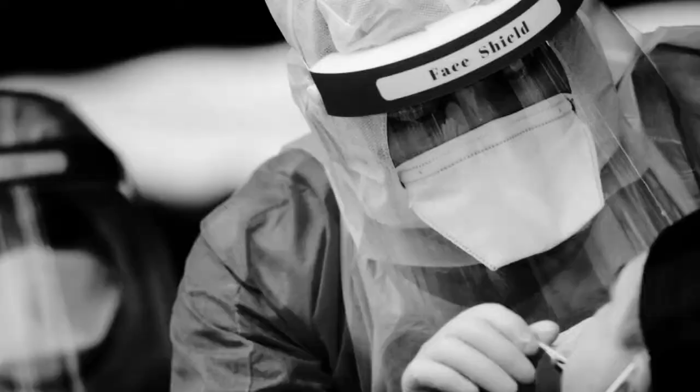As has been observed, the COVID-19 crisis has impacted the way we work, do conferences and meetings. I believe that holding virtual meetings such as this will become a new normal, as it provides many supporting benefits such as the ability to enhance work productivity, reduce traveling costs, and build new connections globally.

Ladies and gentlemen, it is no longer a surprise to see businesses going paperless. Many are now shifting to clouds. We now live in a world where technology has finally matched up with our imagination, changing the way we do things in a much more efficient way.

Similarly, in the military, such technology has to be optimized toward our competitive advantage so that our geographically dispersed forces can focus on their core responsibility. Critical applications and tools such as biometric technology, cyber domain systems, drones and anti-drones, target acquisition, geographic information systems, and many smarter sensory-based applications will be used to aid in quick decision-making.

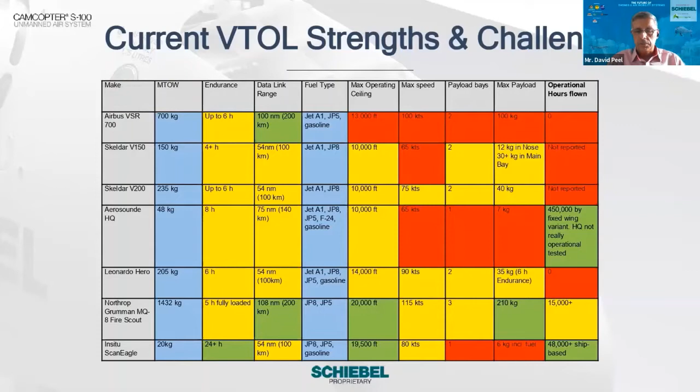Next slide, please. So looking at the technological challenges here, sensor capability has improved enormously over the years. The sensors are getting much smaller, they're getting much lighter. And as this has developed, what has occurred is that the platform that can carry it doesn't need to be as big or have as much capability. But the downside to this for companies is that as the sensor capability increases, we can't necessarily keep pace with the integration of those sensors into existing old platforms.

And we're essentially going down two avenues. The person making the sensor is not the person that's providing the platform that the sensor is operated from. So it needs closer cooperation with the sensor developers and the platform providers to make sure that the technology is compatible. Also, with the need from the end user to have a far greater overall picture, which requires all this latest high definition video footage, geo-fencing, distancing.

And then the ability to process that data and store it is one of the main challenges that we see, because the data link technology, whilst it is obviously moving apace, is not necessarily keeping pace with the end user demand. And as new technology developed, a platform provider has to then look at those data links, how it can get its data transferred in a manner which the end user wants. And that, I would suggest, is one of the bigger challenges.

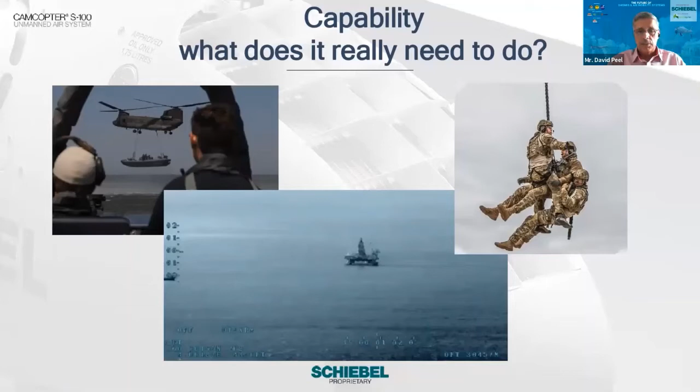So Schiebel have always believed from the outset that we're looking for a multi-role, multi-domain asset. The whole design around the S100 was that we wanted to give it multiple payload bays that could be used in different ways, and that capability would then be complementary, whether it be something underneath on the main cargo hook, or a nose placed sensor. So Schiebel, right at the outset, developed a multi-platform tool with multiple payload bays that could be used in a multi-role situation, rather than just going down the one sensor route.

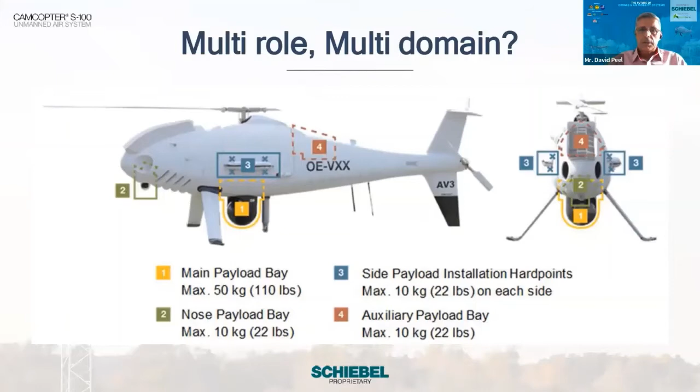Next slide, please. I'd just like to hand back to my colleague Neil, who will talk through some specifics about the S100. Yeah, thank you, Dave. Just to finish off the presentation over the next 5 minutes or so, if we focus now in on the S100, taking in mind what David has said and how well or badly we meet some of those requirements for the future.

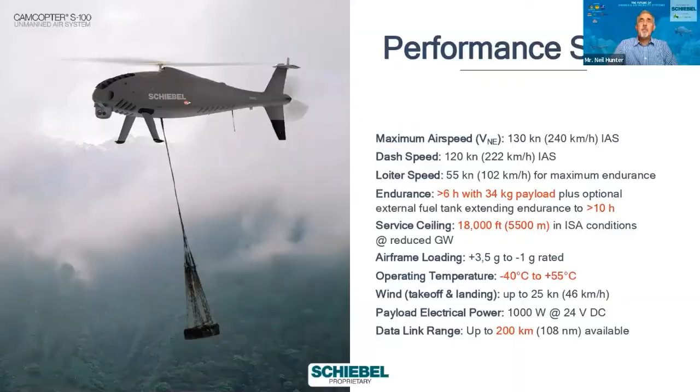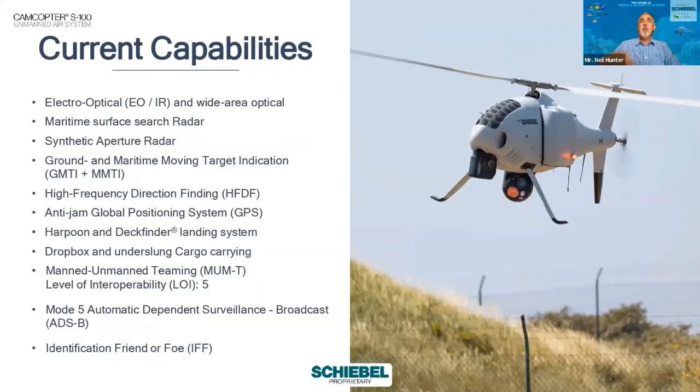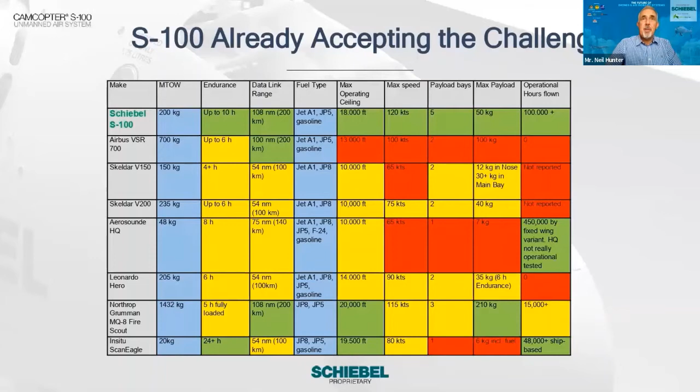So what we've done here at the final slide, we've added in the Schiebel S100 in the top line, and we have, you know, biasly so, probably ranked ourselves as to where we see ourselves with the competition.

And we are truly a multi-role platform with over 100,000 hours of operational experience and still class-leading power-to-weight ratio for what it can do. So yes, it is a multi-role asset that can be used. Is it innovation? Yes, it is. But can it be disruptive? We would like to think so, as long as it is truly used in a multi-role domain rather than single use as it tends to be right now.

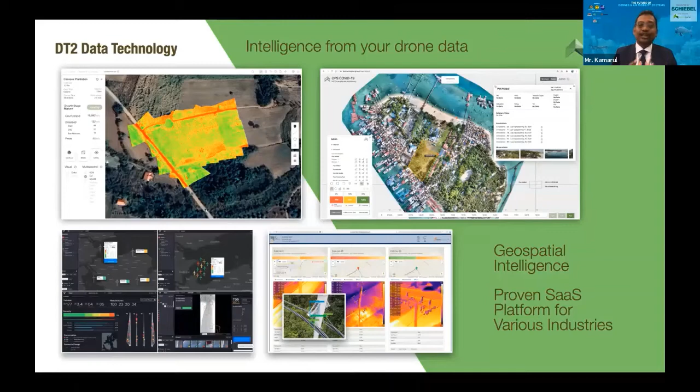Now, data technology by itself is only about analytics, about storing it on the platform. The real value is when you can be disruptive, or rather when we can provide disruptive solutions to our customers. So here is the next step.

I'll talk about this because the previous panelists mentioned the recent COVID-19 period, where drones were being used quite significantly. We actually provided more than 50 personnel to assist both PDRM and ATM between March and June of this year.

The main thing I would like to highlight is zero incident. It's a very safe and secure operation, done with the approval of CAAM. We flew over 57,000 kilometers in those 3.5 months while operating on the CSR basis to help the nation. That's roughly 1.5 times around the world. It's a testimony to how drone done well will add significant value to any operation.

We're also proud to be able to help both ATM and PDRM reduce the number of non-compliance. When we first started this operation, the number was in the high teens percent. Towards the end of the operation, it dipped below 4%. This was a hugely successful joint operation between the Malaysian forces and the industry.

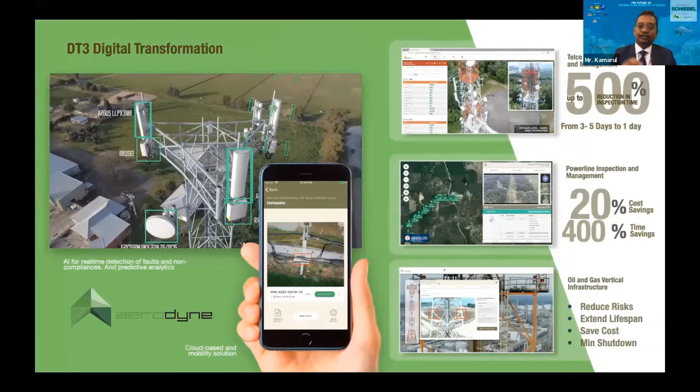So let's go back about the DT3 transformation I mentioned earlier. Drone data are supposed to disrupt your operation. They're supposed to allow you to do things faster, better, cheaper, and safer as well. And that's actually our value proposition.

When we look at power line inspection, for example, we save 20% of the cost, and this is not just in Malaysia but globally right now. We are accelerating the process by 4 times, faster than using the incumbent traditional methods like helicopters or engineers going to the road. This is the disruptive nature, this is the Industry 4.0 we are talking about - how we use drone technology to deliver real value to the industry, to the customers.

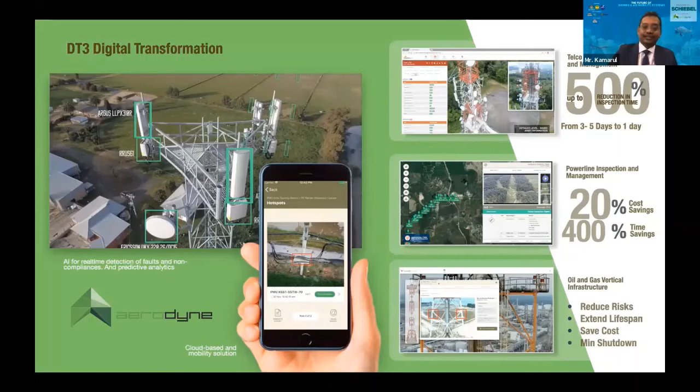We are already testing it. A couple of weeks ago, we were controlling a drone, with approval of course, in the UK - about 10,000 kilometers away from our command center here in Malaysia. So that's the readiness of technology in terms of going to full autonomy.

The regulation, the regulatory support for this, however, is still lagging behind at the moment. For example, flying beyond visual line of sight is understandably not something allowed yet. Flying BVLOS requires a lot of things to be put in place, but the technology is already available, and this is primarily a lot more prevalent if you look at military applications.

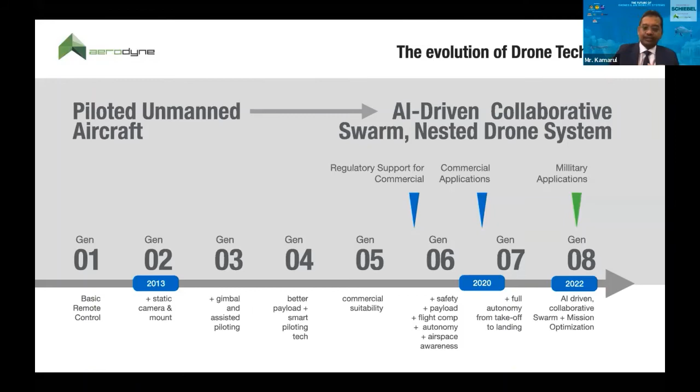So let's take a look at that. On top of that, we're talking about the future, and before I go into the military side, UAM is the future - unmanned urban air mobility. This is really the future. We are expecting by 2025 to have large-scale deployment of UAM in urban areas. UAM is actually an extension of current drone technologies, an upscaling of current drone technology to deliver air mobility.

This is actually a much bigger market, even compared to military utilization of drones. This is something we should all be looking out for, because a lot of things are happening on the UAM side. Now let's go back to the military side. Number one, and this is a little bit scary for me to talk about since I'm not from the military side - but to be honest, smart killer drones, killer robots are already coming, and it is also currently very, very difficult to defend against.

How America was able to end World War II by using the atomic bomb—at that time, no other nation or superpower had mastery over that technology. It's the same thing if we take a step back. What we have now in terms of drone technology is also almost at the same stage. America, China, Israel, Russia are all looking at and developing these things. What we do not have right now is actually how to defend against them.

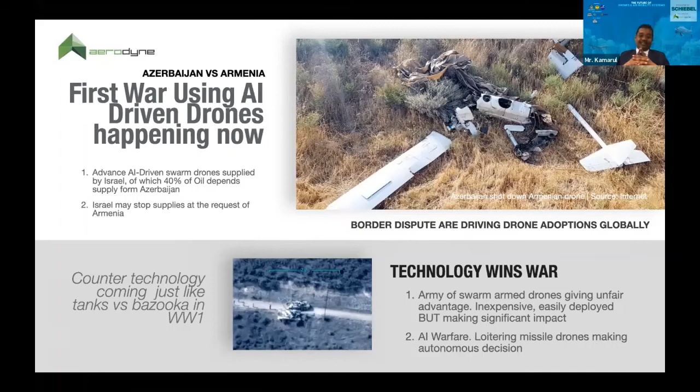So that's actually what has been happening. That's basically the highlight I have. Again, I think the future of drone technology is exciting, but at the same time very, very scary. We really need to be looking at counter drone technology.

At the moment, we are also involved in doing counter drone work. I think what we should really be looking at is, number one, making sure Malaysia has a strong enough drone system to protect ourselves. But at the same time, we should also place significant energy on counter drone systems, because currently a lot of these countries are powerless against these smart AI-driven drones around the world.